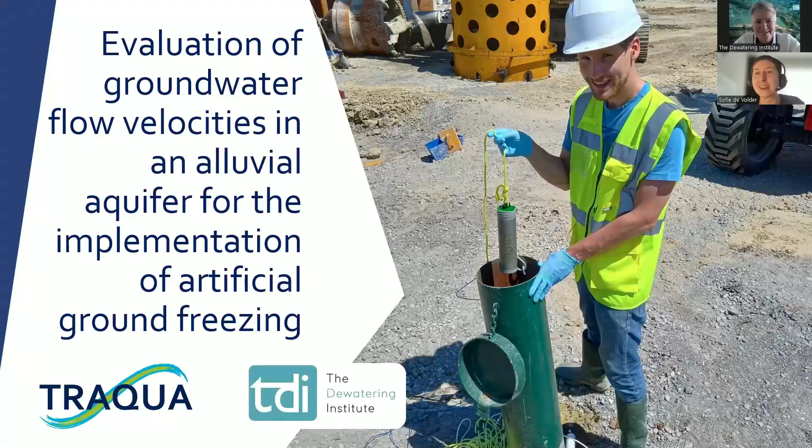I will present a project that we are doing in Brussels. I will not repeat the title, it's quite a long one, so Riet already introduced it. So let's go to the agenda straight away. I will give a short introduction about the company Traqua, the team, and fluorescent dye tracing, which we used here as a technique, and give you a little bit of geological and hydrogeological context, which is quite important in this project.

Just a general idea about the metro, the underground project that we are working on, a small introduction about artificial ground freezing, and then go straight into the works that we did in this project.

So first of all, who are we? We are a small hydrogeology company, actually a spin-off from the University of Namur in the south of Belgium. We are specialized in tracer testing, also called dye tracing, and hydrogeology, with a focus on groundwater but also surface water flows. We analyze, monitor, and characterize groundwater networks or surface water networks, and we can do this in different circumstances: in natural areas like aquifers, rivers and lakes, but also in artificial systems like distribution or drainage networks and sewer systems, or in industrial locations such as mines, construction sites - which is the case here - and drinking water catchments, etc.

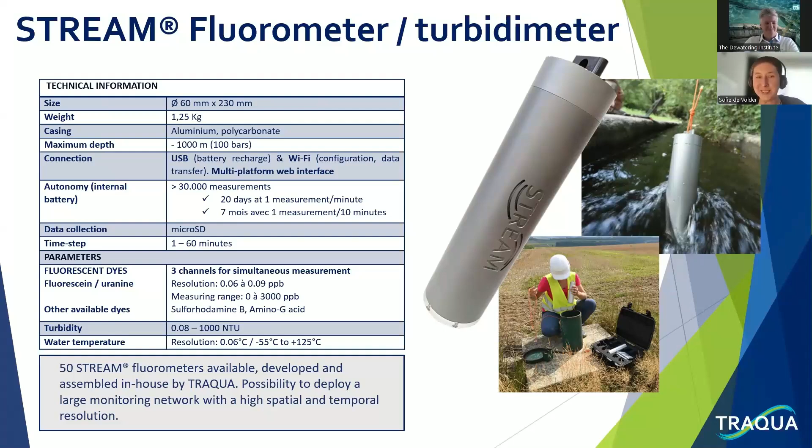To do this tracer testing, which I will explain in a minute, we have developed our own instrument called a stream fluorometer. It's an optical device able to detect fluorescent dyes that we inject ourselves into the water system. Since we developed and produced them ourselves, we have many available, which really helps give an in-depth view of the situation. We can provide high resolution measurements by putting in place a whole network of these stream fluorometers. This is just quickly an example of the instrument that we used in the project I'll present today. It's a quite compact instrument, but I won't go too much into technical detail - feel free to look at it on your own time afterwards.

Now about the team. There's Amel and myself, the co-founders of Traqua. We started Traqua almost four years ago, so in one month we will celebrate our fourth birthday - always a happy moment. Last year our team doubled because we hired Morel and Roma, both hydrogeologists with expertise in tracer testing as well. I'm not a hydrogeologist myself, I'm the business developer of the company, but the three hydrogeologists have experience in different settings - quarry sites, geothermal projects, and karst systems. So among the three of them there is quite some experience within the team.

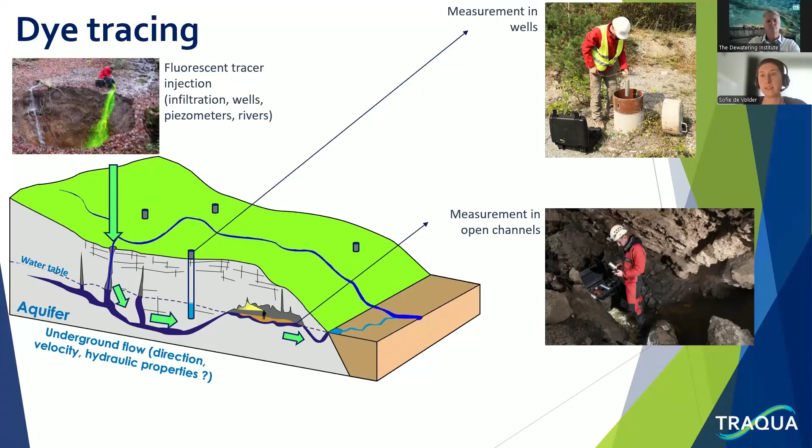Now about dye tracing - what is this all about? Dye tracing is a methodology to characterize groundwater flows or surface water flows, but in general it's used for groundwater. The general idea is that you put in place a whole monitoring network. In our case this is done with our own optical stream fluorometers, but it can also be done with an automatic sampler, manual sampling, or activated carbon packs - any method able to measure, capture, or detect a fluorescent dye. This dye is injected by us, so it's artificial, not present in the natural environment, and of course not toxic. When we inject this dye into either a stream or a piezometer, it distributes within the groundwater, and the measuring network is then able to detect it.

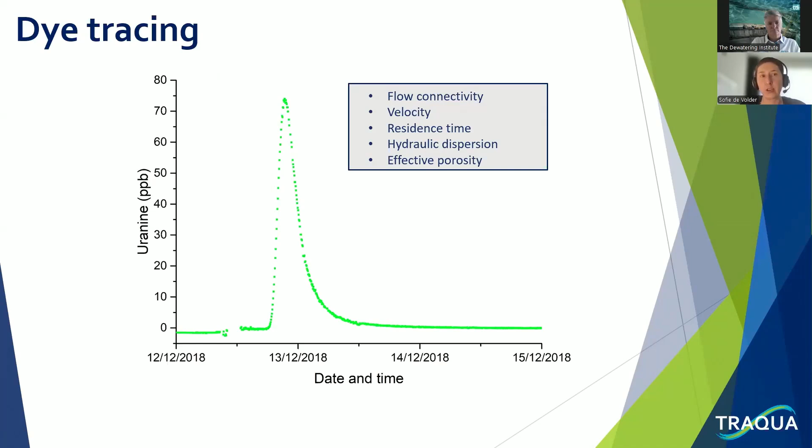This results in what we call a restitution curve - this is a textbook example, it looks very beautiful, but in general it's a bit more complex. What we see here is the time of arrival of the dye, which gives an indication of the speed of the groundwater flow, the velocity. It gives a maximum peak, and then it goes down again until no more dye is detected and it has all passed by the monitoring network. How this peak looks - whether it's more flattened or very straight, or maybe not much dye detected - gives indication about connectivities, velocity, residence times. You can analyze hydraulic dispersion and effective porosity. There's a lot of mathematics and formulas behind it, but these restitution curves can provide quite some information.

Now let's go a little bit deeper into the geological context of Belgium, for those who are not familiar with our tiny country. We are lodged between France and Germany, and even though we are very small, the geology is quite interesting and very diverse. We have a flat, sandy, clayey, silty area in the north, and then a much older, heterogeneous geology in the south.

So what is the geology of Brussels? First of all, we have the Brabant Massif, which we call the bedrock. On the cut, we can see this purple layer - this is the bedrock. It's quite deep in the north, but quite shallow in the south of Brussels, though it doesn't come to the surface in Brussels itself. This is the oldest layer, and on top of that we have all kinds of sediments - primarily sand and silt, with some clay layers as well. Also to note, you can't see the river here, but this is the Senne River - basically the old riverbed.

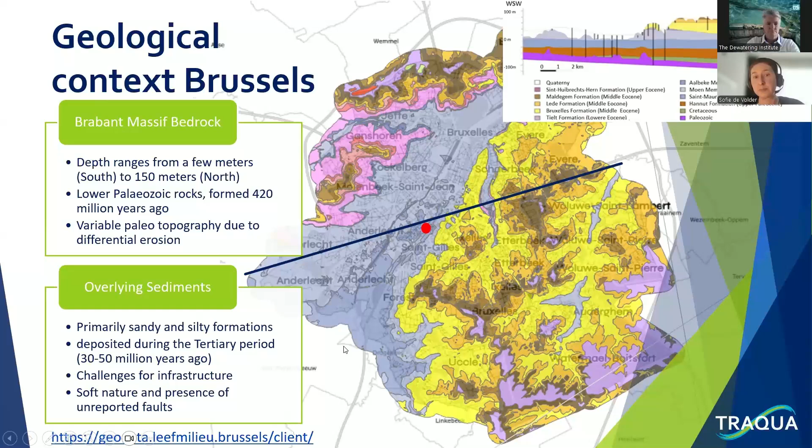If we look at the next map, we look a bit more in detail at the hydrogeology. The light blue colors indicate locations where the groundwater is quite deep, while the very dark blue colors are locations where the groundwater is very shallow, close to the surface. Again we see our red dot location - as you can see, it's an area where the groundwater is very close to the surface, around 2 to 3 meters, again in the old riverbed of the Senne River.

The Senne River doesn't flow freely anymore in Brussels. It's taken up partly by a drainage system and even some sewer system. So it's no longer there visibly, but the groundwater layer is still a remnant of this river basin at this location.

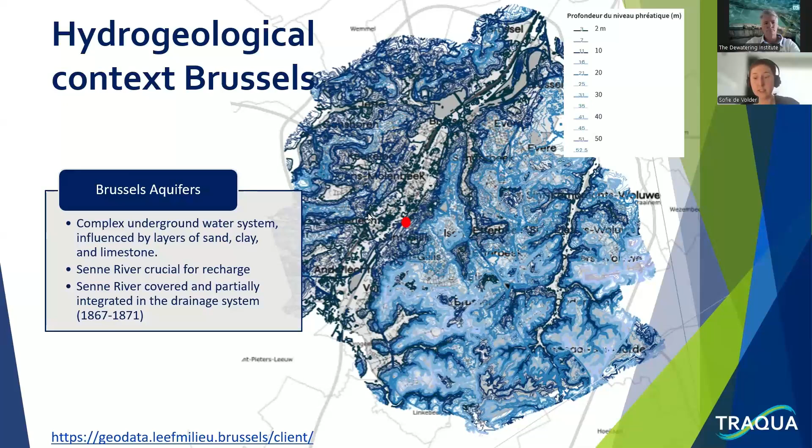So now about the project. We are working as a subcontractor on a project for a new metro line in Brussels, called the M3 metro line. The goal is to connect the north of Brussels to the south. There are already trains, train stations, and some tram stations, but none of them are really well connected. So the goal of this new Metro 3 line is to have a nice connection all the way from the north to the south of Brussels, really improving Brussels public transportation - they invested a lot of money in this.

The whole line will be about 10 kilometers long with 18 stations in total, but of course these are not all new - a lot of them already exist, but will just be connected better with this new metro line. They will also convert some pre-metros or trams, which is usually above ground infrastructure, to this new metro line, and also construct some new tunnels and stations. The project is expected to finish by 2032, but as we all know, construction projects usually take a bit more time. For this first phase, they only plan to construct one new metro station, which is the Toots Thielemans station.

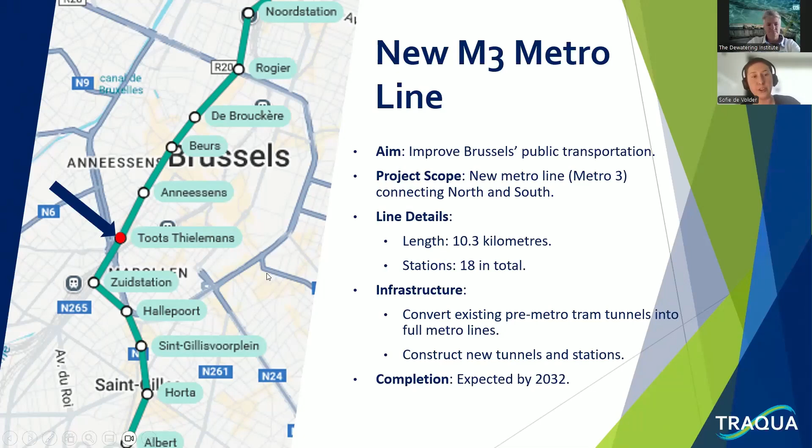For those who know jazz, maybe you know him from the harmonica - he's, well, unfortunately he passed away, but he was a very famous harmonica player. So this is the new station that we will be working on, or that we actually already worked on. The goal is to make this area, called the Stalingrad area, a lot more accessible to the people who live there. It will also be connected to the nearby Lemonnier station.

It's a very complex, very big project, especially for Brussels or Belgium norms - quite a big project, probably one of the biggest in recent years. And the site is very, very complex. It's a very urbanized area with a lot of shops and buildings. There's a large connecting highway in Brussels, a train station nearby, an existing metro line, a tram line, and of course the sewers going through the area.

There's also another huge building nearby, called the Zuidpaleis or South Palace, which is not the most stable building, but it's quite a renowned one. It used to be a covered market, and now it contains sports facilities and administrative offices, etc. There's a procedure going on to classify this building because they want to keep it. The problem is part of the new metro tunnel is supposed to go underneath this building.

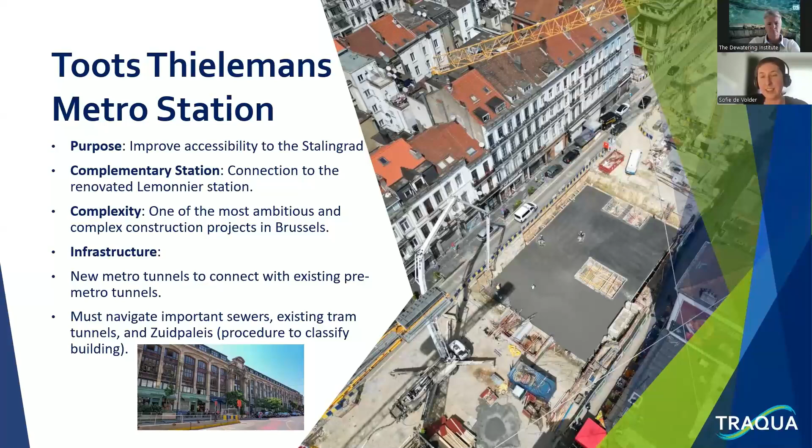So that's another challenge of this particular area. Now if you go a little bit deeper into the construction site, this is a Google image on the map. You see it's basically the same. So we can divide the construction zone into two big parts.

The blue one is where they will build already part of the tunnel. This is an open, or at least it was an open construction pit. And then we have another small site here. Of course, this is all one big construction site, but they are divided into two parts, and the car highway can continue in between them.

Here we can see the entrance of the already existing tram tunnel, which enters here and turns north and comes out again here. If you go south, following the red arrow, we will arrive at the Midi train station, so there's the train station nearby. There's already an existing metro station, Lemonnier, here in the north.

And if we go a little bit more north here, we have this big famous South Palace that is going to be protected maybe in the near future. This is just the building of the construction site itself, and the challenging part is this light green part. This is why they want to create a new tunnel.

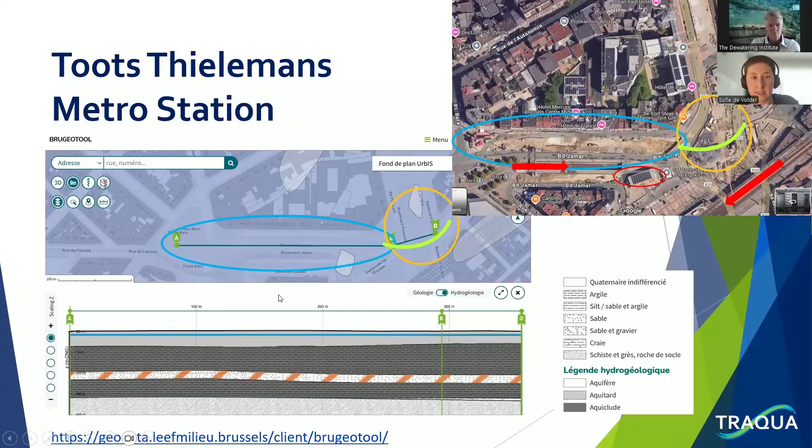Which is of course part of the alluvial deposits as well. So it's a very, very heterogeneous layer, and the phreatic layer is very shallow on this particular site, 2 to 3 meters beneath the surface.

Again, this is a little bit more in detail what the metro tunnel will look like. So this is part of the metro tunnel that is already built. This is, as you could remember, the first part of the construction site here. This is the other part of the construction site, and the tunnel will be constructed here.

They will use a ground freezing method for this. You could ask yourself why artificial ground freezing, and why not, for example, a tunnel boring machine? Well, this is exactly the reason.

It's a very short bit, but it's not straight, so there's a curve in it, which of course can't be done by a tunnel boring machine at such a short distance. So this is a limiting factor to use a tunnel boring machine.

Another limiting factor, of course, is the fact that it would be already underground. It will be underwater. The groundwater level is very high here, and the already existing tramway tunnel, which is roughly going this direction, is already in the groundwater layer. So this new metro tunnel would have to go underneath it, which makes it extremely difficult or almost impossible for a tunnel boring machine.

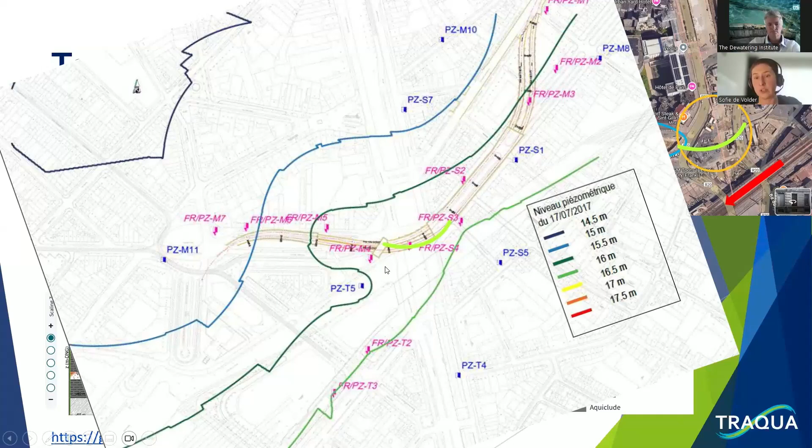So that's why they choose to implement this artificial ground freezing on this specific, particular spot of this metro project. And this is where we come in. So roughly, what is artificial ground freezing? Very simply stated, it's freezing the ground with a coolant, usually nitrogen followed by a brine, to freeze the ground in order to stabilize it.

So this is a very good methodology in sand and silt, which are of course not very stable. Freezing this ground, and of course the groundwater in this ground, will be able to stabilize this area. It's commonly used for the construction of shafts and tunnels, so which is the case here, and usually in areas where the geology is quite complex and difficult to work with, and where the groundwater levels are high, which is also the case in this project.

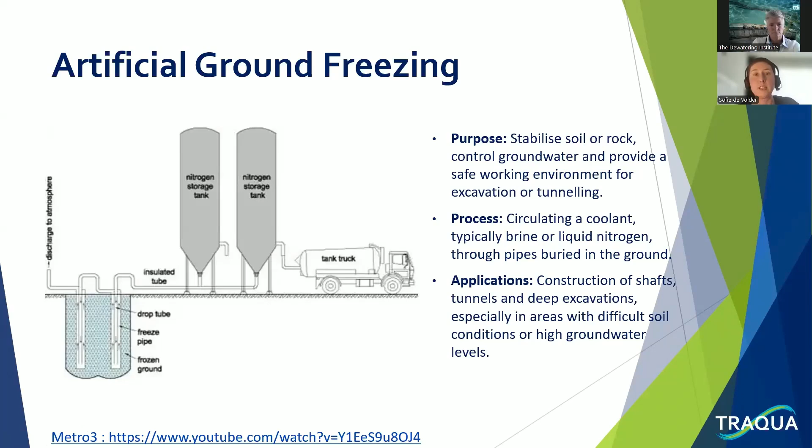Here you see a little picture. This is not from the site. Unfortunately, I don't have pictures, of course, because the ground freezing hasn't started yet. But I also don't have pictures of the tubes, because I was not allowed into this specific zone of the project.

Artificial ground freezing has some advantages. Of course, it can stabilize the ground. It's also very useful to control the groundwater, because it will just freeze the whole area. It can be applied to a whole range of different soil types, and it's really a temporary measure. So if managed correctly and frozen at a good speed, then thawed at a good speed, it will not alter the soil properties. Once the zone is defrosted or thawed, it will go back to the original state.

Unfortunately, that has also some limitations. It's very costly because you have to constantly inject a coolant, either liquid nitrogen or a brine, for several days. Of course, this is very energy consuming. You also really have to carefully monitor the freezing and the thawing. You need big containers to store this coolant, and you have to be able to reach the site with all the trucks and machinery. So it might not be suitable for all sites, just for logistical reasons.

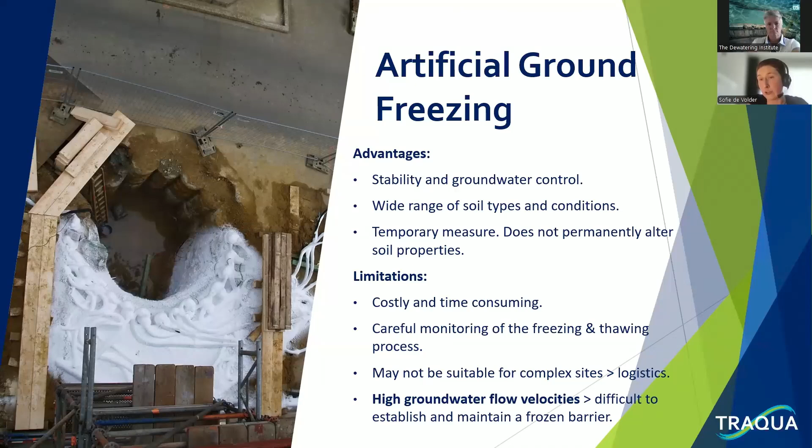Another potential limitation is the groundwater velocity. If the groundwater velocities are too high, the area will not be able to remain frozen, because the constant flow of groundwater will defrost it, which is of course a very important factor. This is basically why we were called into this project: to do a very local hydrogeological analysis, to determine how much brine they would have to use to keep this area frozen for the construction of the new metro tunnel.

This might look complex, but it's not that complex. Here on top, we see where the tramway goes, which is of course underground. Sideways, or basically underground, we see the tramway, which is this part. We see one construction site and then the smaller one on the right. The tunnel will be built underneath the already existing tramway on this part. So the part they want to freeze is this zone, which is not very large, but it's quite important and also quite a complex area.

So what we started with is a first general determination of flow velocities in the zone where the artificial ground freezing would be applied. This is exactly this area. We did this by implementing 4 dye tracing tests. There you can see 4 boreholes, 2 on this side, 2 on this side. Some areas were not accessible, so we had to choose the borehole locations outside of already existing constructions and infrastructure. We did our tracer tests under pumping conditions, which I will show you a little bit further.

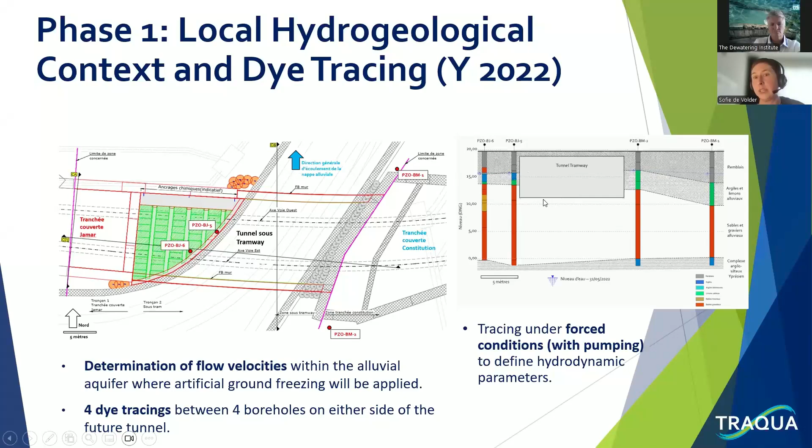Here again you see the sideways view with the already existing tramway tunnel, 2 boreholes on one side, 2 boreholes on the other side. This is the top of the clay layer we saw earlier, with more or less 20 meters of alluvial deposits on top of it. Here you can see that the groundwater level is very high, this very thin blue line. So basically the already existing tunnel is already half immersed in the groundwater. The new metro tunnel, which will be underneath here, will be completely surrounded by groundwater.

So what did we do for the tracer testing? This is the general setup of the tracer test. Just to clarify this schematic overview: we have an injection well and a pumping well on the other side. Here you can see the thickness of the aquifer. Since we are actively pumping, you have a cone of depression here, so the piezometric level will lower a bit near the pumping well. You have the tracer injection, which moves to the pumping well at the apparent velocity, you have the effective porosity of the aquifer, and this demonstrates the thickness.

We also had our stream fluorometer, shown earlier, outside in a detection cell that we made ourselves. You can see an example here. Our instrument is set up in a waterproof measuring cell. Water flows in and then flows out again, and the instrument optically detects the passage of fluorescent dye. Here again, on the picture above, you see pumping going into the system, into the measuring cell, and going out. The water was afterwards rejected into the sewer system. There was no provision to put it back into the aquifer.

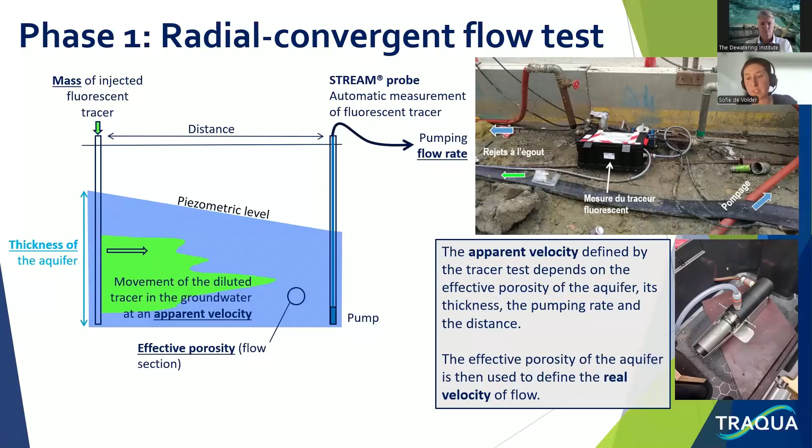Of course, this is only possible in certain conditions. Here we assume radial convergent flow, and that this radial convergent flow is valid. There were other pumping tests that we did later where this was not the case, and then you need to do more complex calculations to come up with a range of real velocities.

So this is the first dye tracer test that we did between the boreholes you can see here. The distance was very short. This was done on purpose because, since this was the first tracer test, we just wanted to have a general idea about the effective porosity of the aquifer.

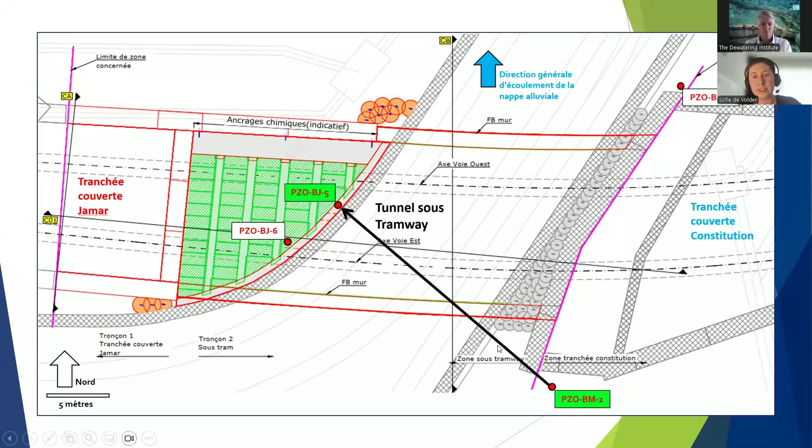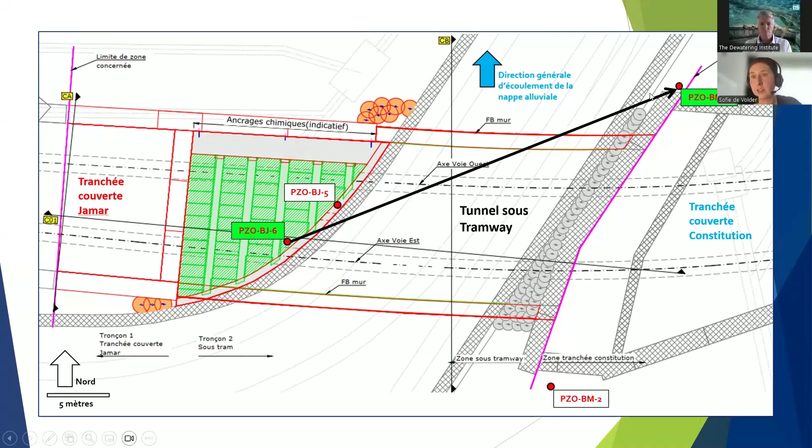Here you can also see the general direction of the groundwater flow. I'll just switch to this other tracer test that we did. We did 4 in total. Another one a bit further. You see that the cross ones are both going exactly through the zone where the ground freezing will take place. And then a last one, a test going from this borehole to the other one.

You could ask yourself why didn't we analyze directly in the zone where the ground freezing will take place, maybe with a single borehole pumping test or others. But of course, in this case, this is not possible because there's already an existing underground tramway tunnel in this location, so there's no way to access this exact location where the ground freezing will take place.

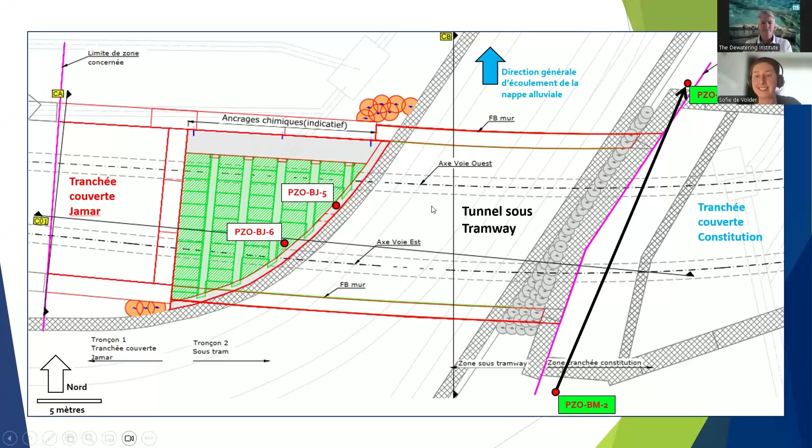So this is a kind of turnaround methodology to still have a good view on what is happening underneath this zone, which is a bit of a black box but still needs to be quantified since the ground freezing will take place here.

So this is the result of the first test. I will only show you this one because the other ones didn't show the radial convergence model well—it wasn't valid in the other locations, so the interpretation of results is a lot more complex, which might take us a bit too far, and which is also not my expertise. If you have questions about the other tests, feel free to contact one of my colleagues.

But what we see here, remember, this is the first test, the very short distance between the two boreholes. What we see here is the first arrival time of the tracer, which is already around 2 to 3 hours. We see the concentration, maximum concentration, and then the dye disappears again until it's back to base level. We also had on this first tracer test almost 100% tracer recovery, which wasn't the case on the other tests.

So based on the fact that we almost had 100% tracer recovery and a very nice restitution curve, in this test we assumed that the radial convergent model was valid, but again, this was not the case for the other tests. But it helped us calculate an effective porosity of this area.

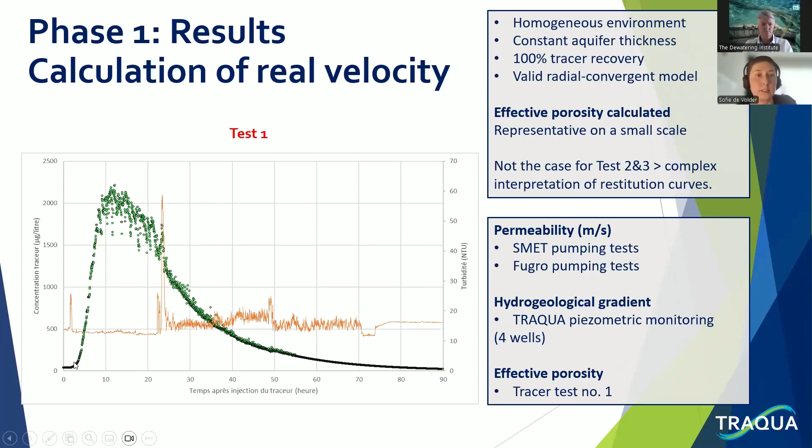So from this first phase, which contained the 4 tracer tests, we already noticed quite some things. First of all, we know that the aquifer was extremely heterogeneous—not from the first tracer test, but from the 2 or 3 other tracer tests. The thickness varies, which we saw from borehole and CPT tests. There's a lot of variation in the permeability and the porosity. There were some clay lenses as well. And of course, there's an effect of the already existing tram tunnel as well.

The radial convergent model is not applicable for this whole context, although we did use it in the first test just to come up with the effective porosity. But considering the very heterogeneous situation of the underground there, we decided to also permanently monitor the piezometric gradient afterwards, after the tracer testing, to really see what's going on there while they were constructing the different parts of this new metro tunnel.

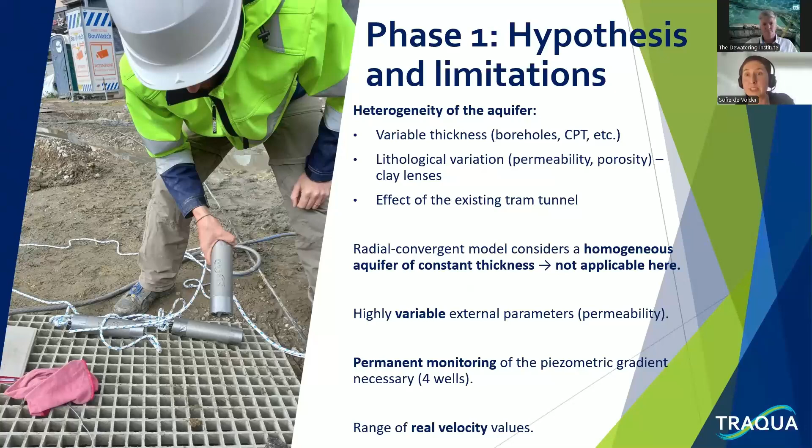This was something else that we did. This is even more complex, so I won't show you the restitution curves, but it again demonstrated the extremely high heterogeneity of the underground.

This is another project outside of the four initial tracer tests that we did, in natural conditions. We installed 10 fluorometers in two boreholes, and then injected fluorescent dye in another borehole. We saw that at the different levels where the fluorometers were installed, the dye arrived at vastly different times. So the speed of the groundwater flow within the aquifer is very different depending on the depth.

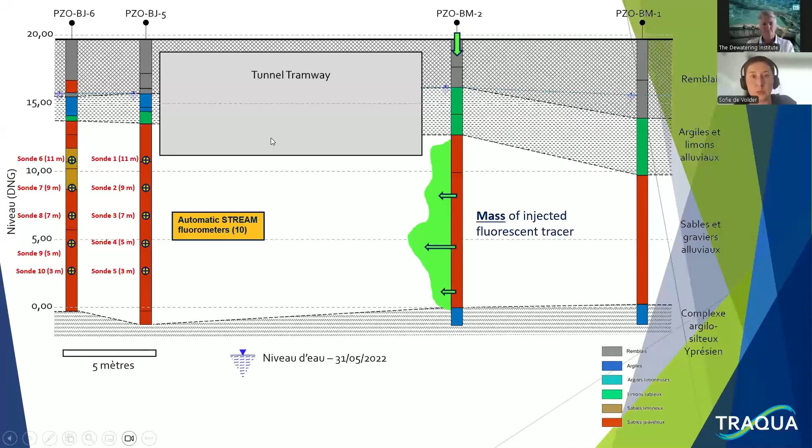So there's a lot going on here, a lot of heterogeneity, and it's going to be quite tricky to implement the artificial ground freezing here. Once we had an idea about the real velocities, or at least the range of real velocities, we decided to continue with continuous water level monitoring while they were doing the groundworks. They were already building other parts of the tunnel before and after this tricky location where they will implement the ground freezing.

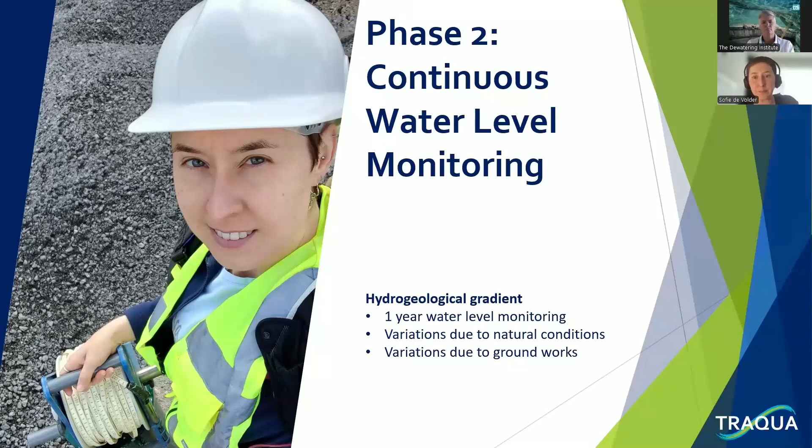This was to get a general idea about, first of all, variations due to natural conditions. There's a lot of pictures of me and my colleague because we mostly did the monitoring for the whole year. And of course, there will be variations due to the groundworks in the tunnel before and after the tricky part. So we did monitoring for one year.

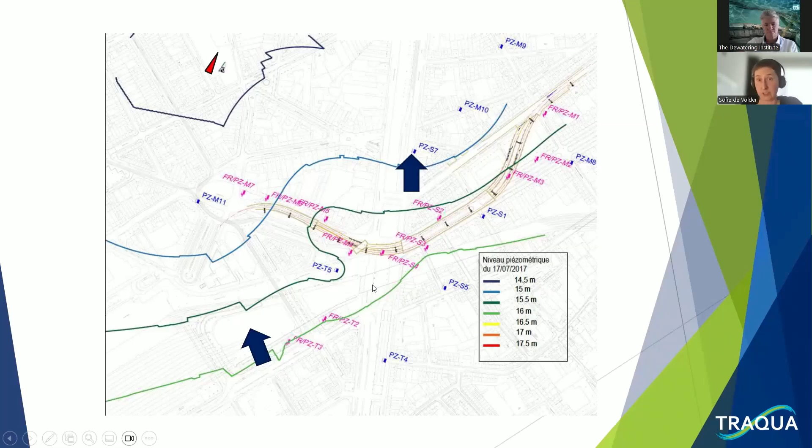So that brings us to the next phase, which started now. We didn't do any monitoring for a whole year because they stopped working on this side and continued working on the South Palace site, a little bit further up north.

But what we will start doing this year is again continuous water level monitoring. We use these little divers to do this - you can just drop them into the piezometer at a certain level, and they automatically monitor the pressure, which gives an idea about groundwater level fluctuations.

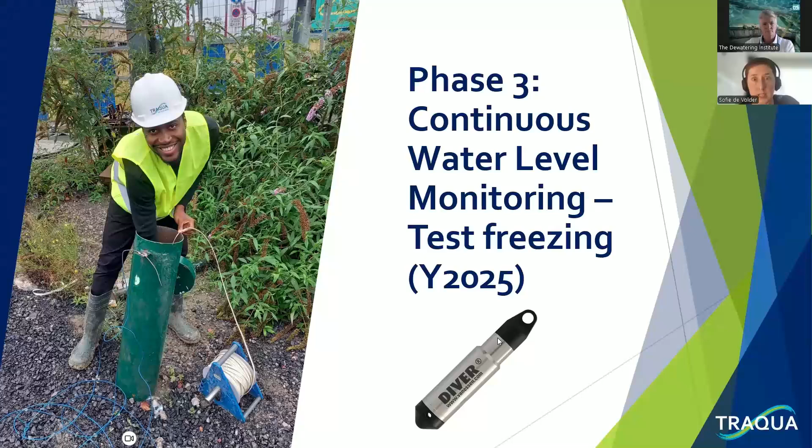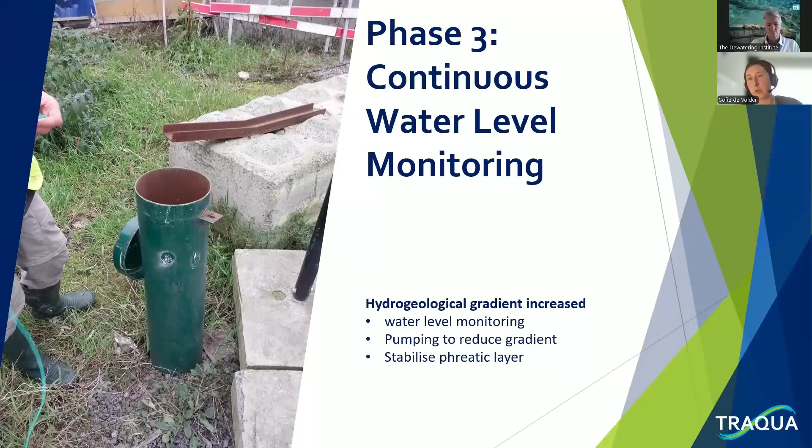So again, the idea for this year is to monitor the water level for a whole year, while the project coordinators start pumping on the southern side of this wall they built, to reduce the hydrogeological gradient and stabilize the groundwater level. There's already an existing wall here for one part of the tunnel, and some infrastructure on this side. Water is still flowing freely underneath the existing tramway with quite a high hydrogeological gradient, because all the groundwater is forced through this zone. They will start pumping on the southern side to try to lower the hydrogeological gradient and, as such, lower the groundwater speed, so they can safely implement this ground freezing method.